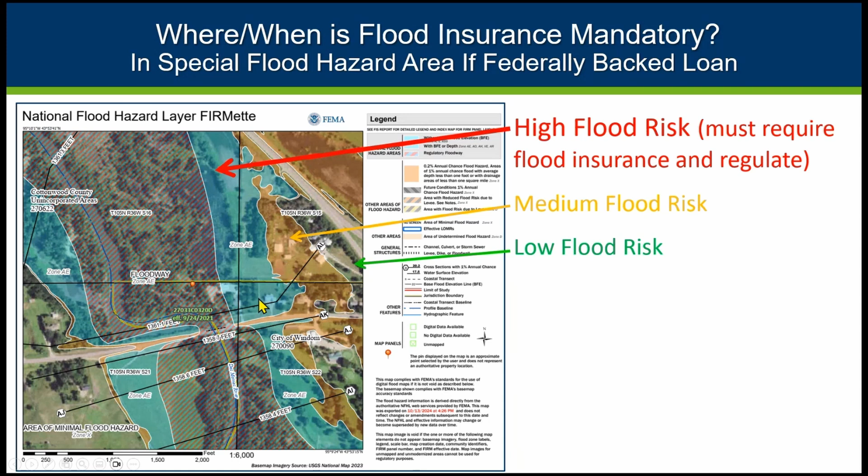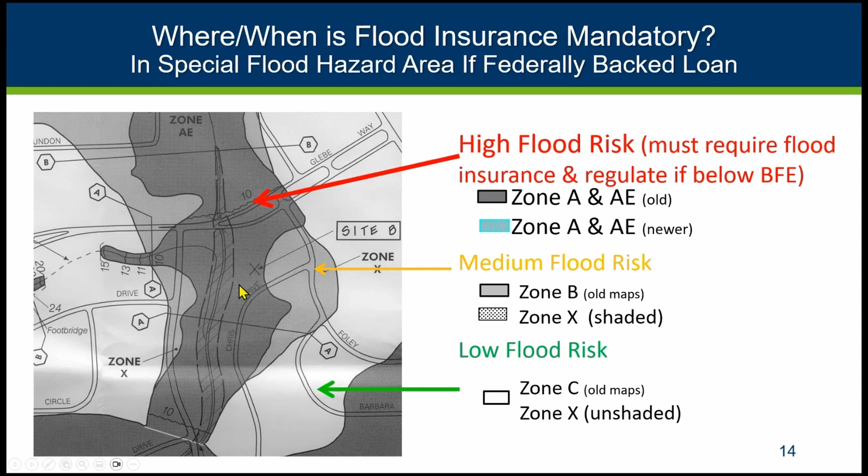On the older maps that unfortunately some of you still have, the high risk area, the special flood hazard area, is the dark shaded area, including the floodway if it shows a floodway. And again, you've got the medium risk area. It's good for planning purposes, helping reduce risk there, but that is not mandatory flood insurance there. We'll use similar terms here.

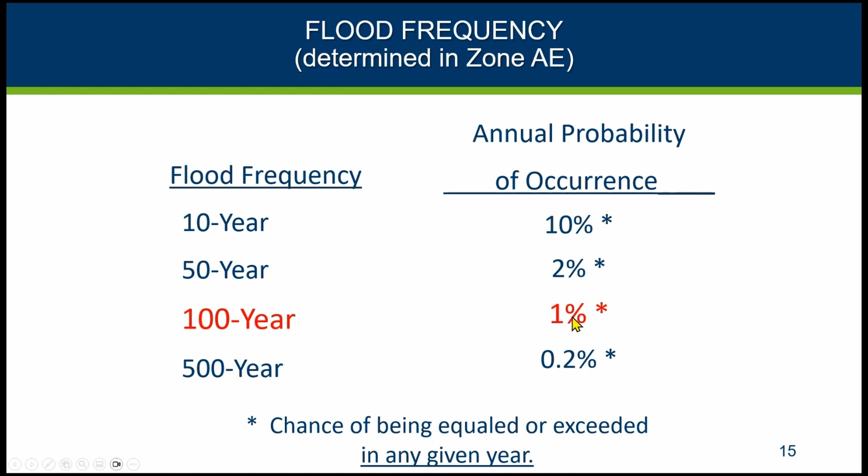We talk about the 100-year floodplain or the 1% annual chance floodplain. We try and not use the term 100-year all the time, but that's what people understand. But we try to not use it because we don't get floods once every 100 years. There are other frequencies available where we've got mapping and more data, but for the mandatory insurance requirement, we are using that 1% annual chance flood.

And here's some of the other terms I've already been using. FEMA will also call it the base flood elevation, or BFE. In Minnesota law, we'll call it the regional flood. But for insurance, we're going to be focused on the term special flood hazard area, or SFHA.

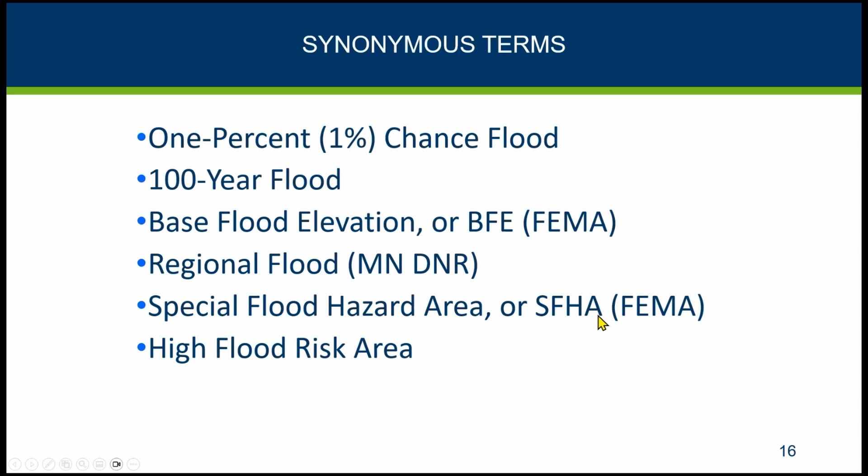So is it in a floodplain for zoning or for mandatory flood insurance? In this site, this is showing the FEMA mapped area, and this house, even though you can see it's really high, it is in the FEMA mapped area, and a lender must require them to get flood insurance if they've got a federally backed loan. Whereas this building over here, they're officially out of that area, at least on the current maps. In the future, when the maps are made more accurate using that elevation data, they'll be shown in the floodplain. But right now they're out, so they won't have mandatory flood insurance.

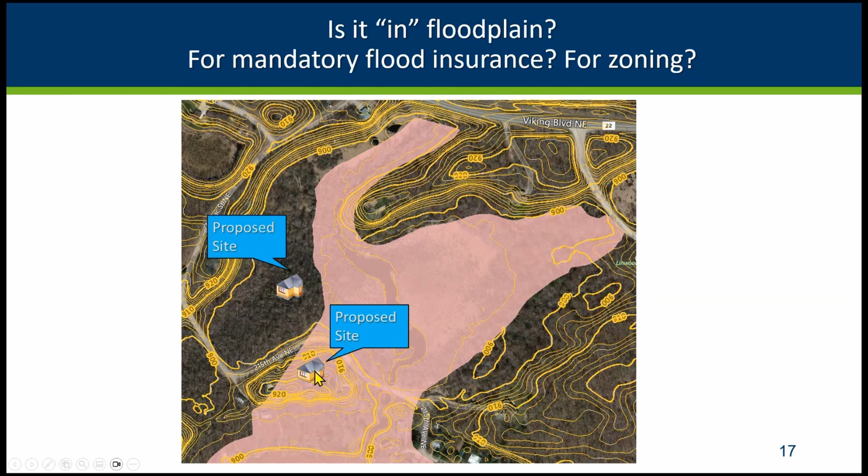But those of you who have seen our trainings on our regulations and have worked with the regulations in Minnesota know that we've got rules that say if it's adjoining a FEMA mapped area and the site is below the base flood elevation, your ordinance is regulating that building and making sure that they're building safely. But for folks like this that are on a high spot, they will be required to get flood insurance unless they get a FEMA exemption, basically a waiver.

And let's talk about that a little bit briefly here. So in this example here, you can see this building, this whole parcel is not touching the floodplain. Sometimes lenders will send out letters when there's new maps and say a place like this is required to get flood insurance because they're using some kind of a buffer. They're using computer overlays and looking at that. But this is an area that's clearly not mandatory flood insurance.

Here's an example of a building that if you look closely, you can see that there's space between the building and the mapped area, but there is mapped floodplain on that parcel. And that's a situation where the lender may say, hey, you have to get flood insurance. But if that person looks closely at the map, they're actually out and it's not actually mandatory flood insurance. But this one, it's just nicking the building. It's not hitting it a lot, but it is touching that building, and that lender must require flood insurance unless they've gotten that waiver there.

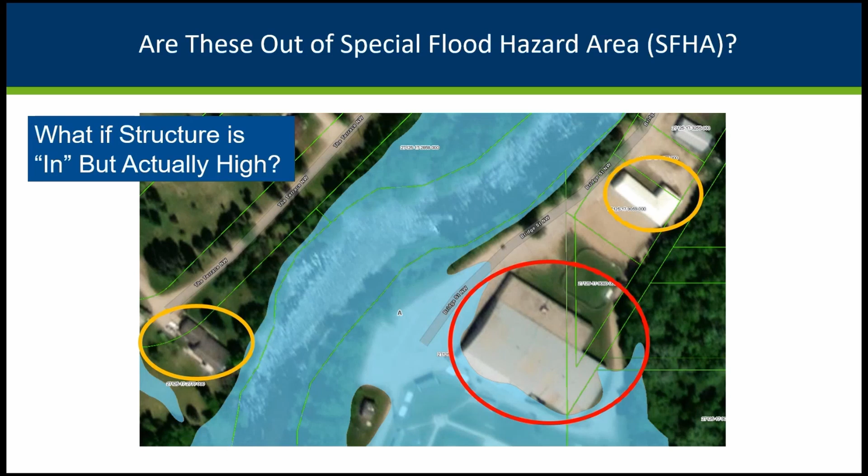So if the buildings are actually high, there is the option to get a letter of map change. And we've done separate trainings on this when we talk about FEMA map basics. We talk a little bit about letters of map change, and we've got an older one of our virtual trainings that goes into more detail about letters of map change in general. But a LOMA is when the natural ground is actually high and you submit that information to FEMA and they say, yep, we agree that's high, and you're officially not in the floodplain and you don't have the mandatory insurance requirement. An out-as-shown would be for that house that's close to the floodplain but not actually touching it. FEMA issues a determination agreeing that, yep, that building's not in there, it doesn't have the mandatory flood insurance.

Letter of determination review is an option, but it's not a great one because you have to pay and you don't end up with that actual waiver. It's more of a, does FEMA think the building's in the floodplain or not? Kind of a chance to argue with the determination the lender has made. But then a letter of map revision is similar to a LOMA if it's a letter of map revision based on fill. They've brought in fill and they've elevated, and FEMA will give the mandatory insurance waiver there because they've reduced their risk.

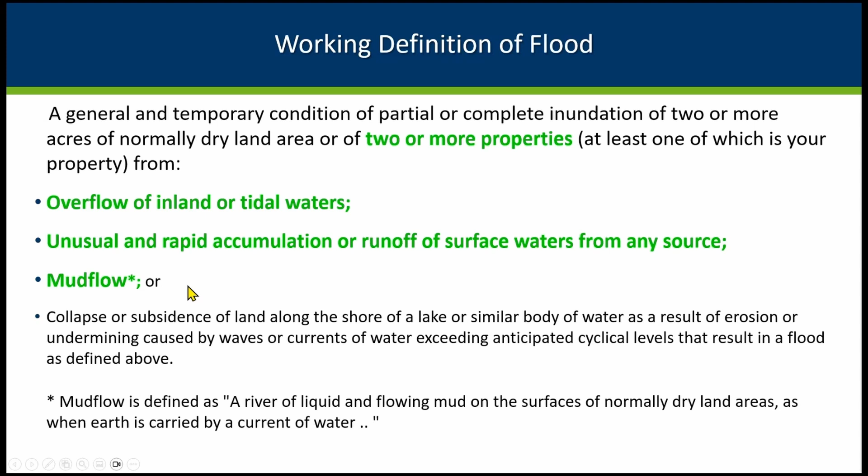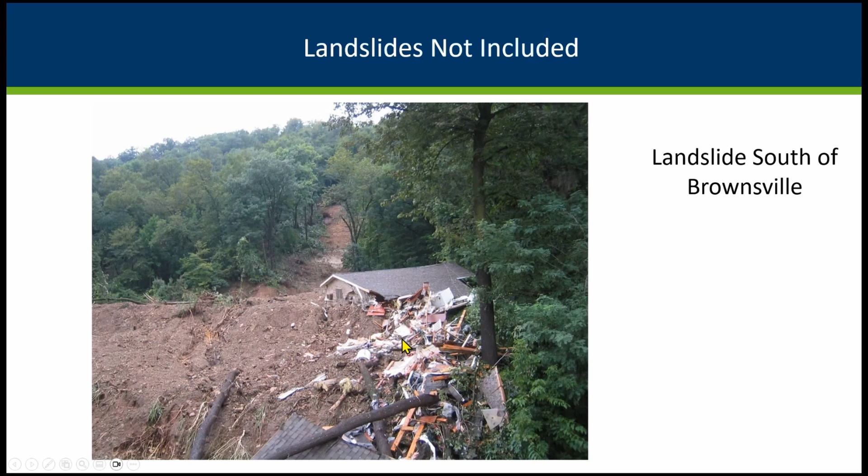There's also situations with mud flow, and if we get into that, we'll talk about it more with the community. That's a lot less common. And mud flow is different from a landslide. Landslides are not covered. So if you've got an unstable, steep area that gets oversaturated, boy, in 2014 we had a lot of these kinds of things, that comes down and landslides can be very devastating. This picture is a good example of how devastating they can be. And unfortunately, flood insurance doesn't cover that damage.

The contents coverage is all your stuff. And on the upper levels, it's pretty broad, the stuff that's covered. In areas that are below grade, in a basement, or if you're in a split level that's partly below grade, it's going to cover very limited stuff. It does cover your washer, dryer, freezer with food, and a few things like that, but it won't cover your stuff in the basement.

The other thing I want to point out is that it doesn't cover sewer backups or sump pump backups, and that is something you can get as a rider on your home hazard insurance. So another education point is making people aware that in many places that's going to be a really good idea, and it's not super expensive on your homeowner insurance.

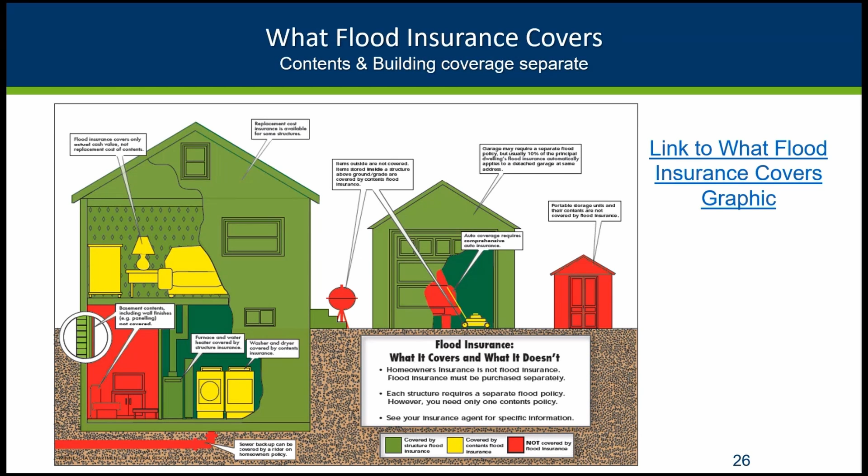But other things are not covered by the flood insurance. So if you leave that building wet and don't get in and clean stuff up, that mold and mildew is not covered. And some of these other things listed, things that are outside and separate, of course, don't get covered. The living expenses, if you need to move someplace else because your place is really damaged, the standard flood insurance does not cover that. I will mention that there are getting to be more private policies available. Some of them will have that coverage in there.

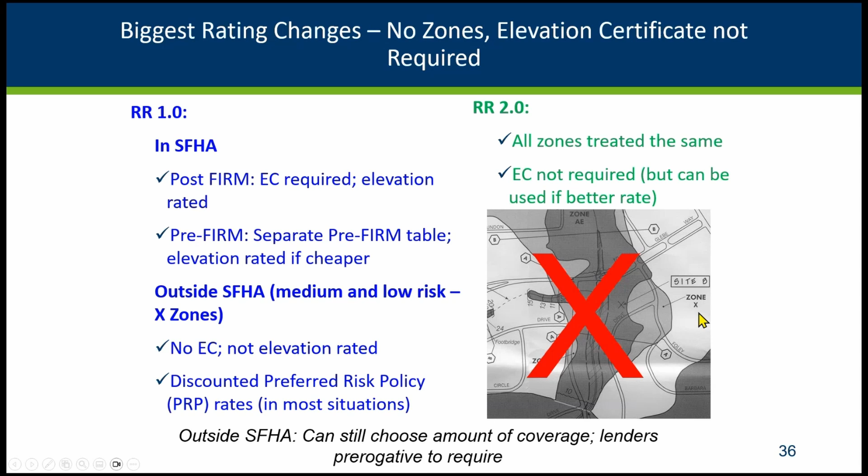Oh, and this is my reminder to mention that lenders, while there's a federal requirement to require flood insurance if you're in the high risk area, the lenders have the prerogative to require it. They're taking the risk giving that loan to that property. So some lenders might require flood insurance in the 500-year or other areas, but it's not a federal requirement.

And this was this preferred risk policy we used to talk about, and the premiums range from like 200 to 700 depending on how much coverage they got. Those have gone away as of a few years ago. So those are the ones that are going to take a while to get to full risk rates because they're taking 18% of this 200 to 700 a year, and 18% of that is not a ton. So some of them are probably on a 10-year or so glide path.

So what are they using now? Okay, in the past, those main things that I was talking about: what zone were they in? What's the flood elevation?

Also, they would look at, do you have a basement? How many floors do you have? That kind of stuff. And then they would require information on elevations if they were in the flood zone. Now we're looking at a whole bunch of different things. I'll get into a little bit more detail on some of these, but just be aware that they're looking at a lot more.

One of the biggies is the distance to the flooding source, and whether it's riverine or pluvial, that kind of urban flooding that you get from the big storms, or they now also look at distance from the Great Lakes. Certainly on the coast, whether the flooding source is coastal makes a big difference in the premiums.

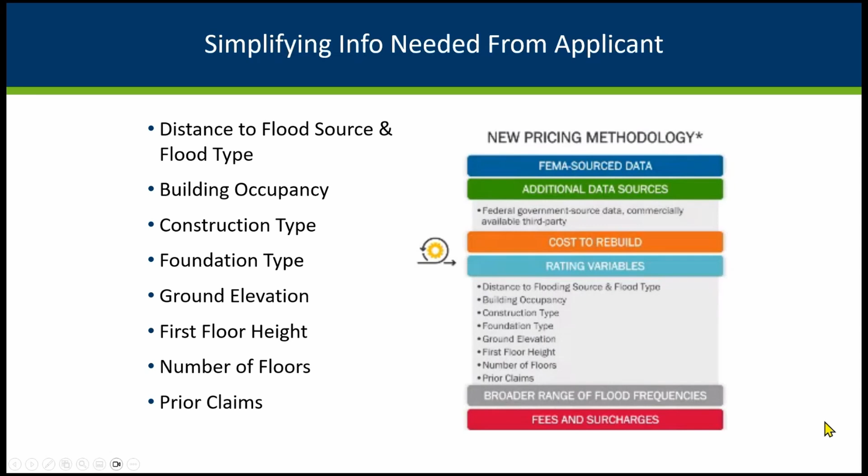But what they do is the agent will put basic information into the FEMA system. They've got this behind the scenes rating engine that takes a bunch of factors into consideration. You do look at the value of the building and the type of construction and a couple things that the agent can enter, but a lot of the factors and the rates are behind the scenes. So whereas in the past, I could look in a table and say, hey, if you're 2 feet higher, it's going to be this difference in your premium, we can't do that anymore. They use a lot of big data.

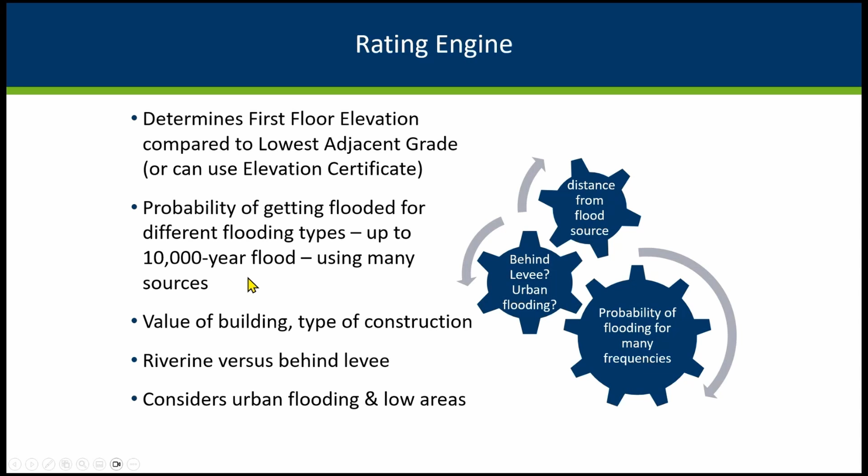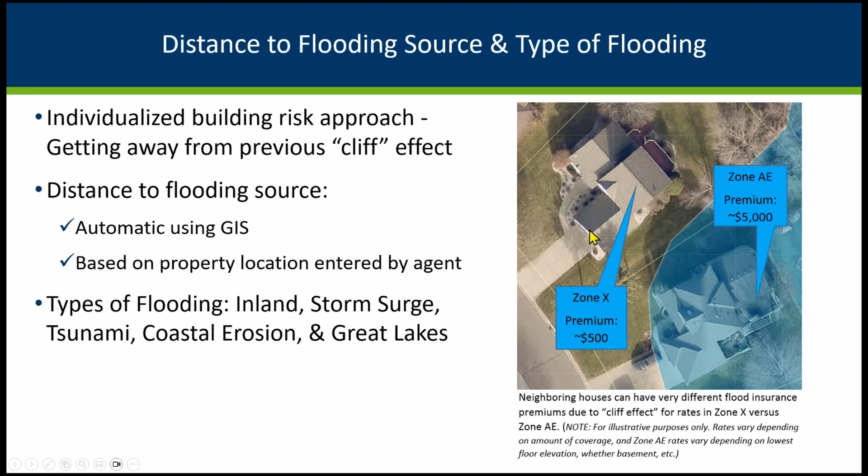But the good news is that we don't have the big cliffs. It used to be someone who's just inside the floodplain would have a big premium, and someone who's just outside could get the preferred risk policy, that cheaper discounted premium. And now these neighboring properties will be treated more similarly. So some of these folks had some nice decreases with the new system. It was fairer for them. But for many of our policies in the state, previously like 65, even 70% of our policies were those discounted policies in the past.

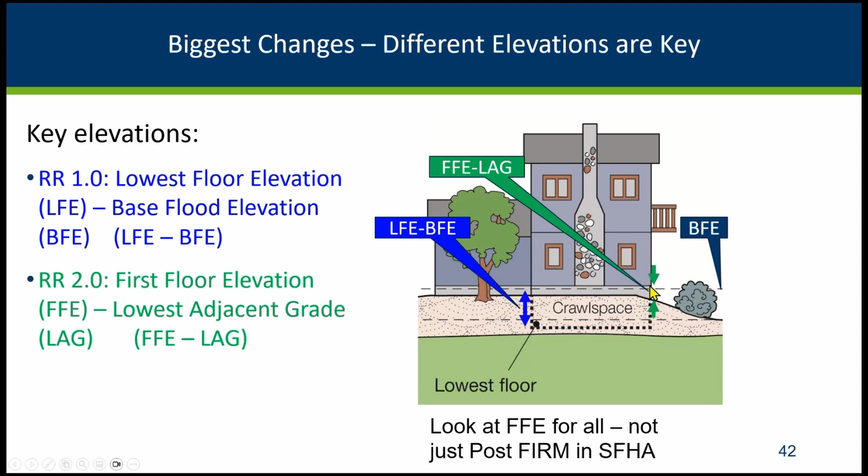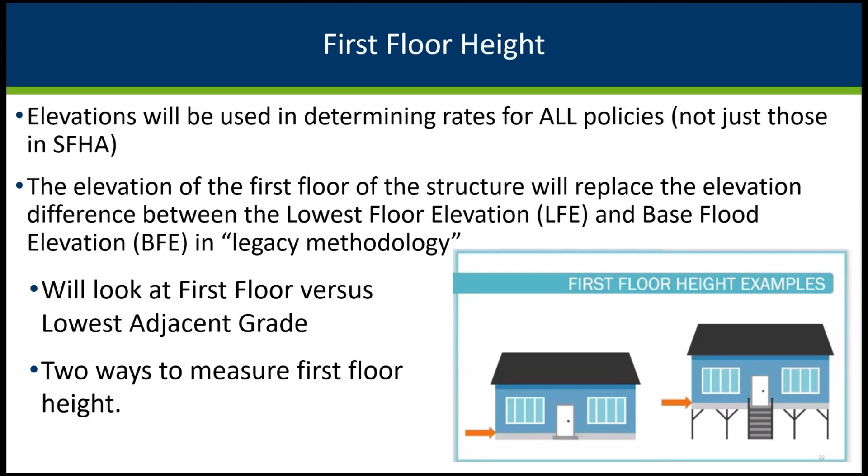So again, in the past, we looked at the comparison of the base flood elevation versus the lowest floor. Now they look at the lowest adjacent grade, the lowest ground touching the building, compared to the first above grade floor. They will look at the elevations and what's considered the first floor. Here's an example. If it's a slab on grade, it's pretty obvious where that first floor is. If it's up on pilings, it's obviously up here. But FEMA has different types of building options that the agents will use to rate the buildings.

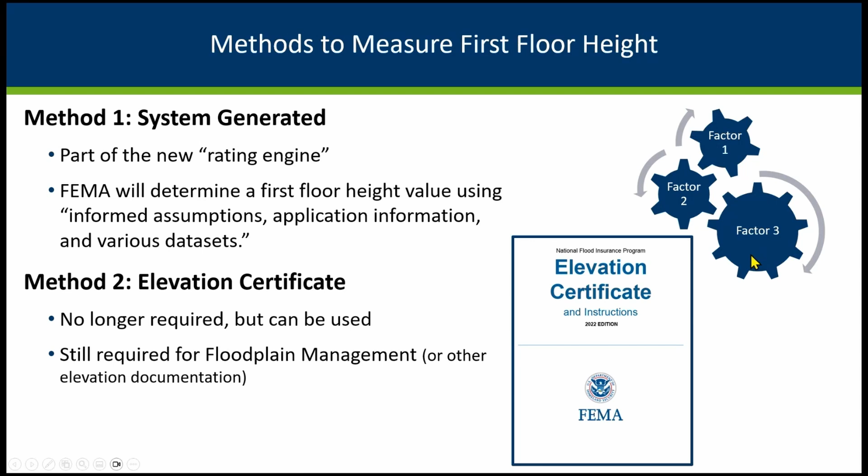But then you can include the elevation certificate. So you can have them use this behind the scenes, big data driven rating engine, or you can submit an elevation certificate and they will take whichever is better. If your elevation certificate gives you a better rate, they'll use that. If it doesn't, they'll go with the rating engine determination. So elevation certificates are still really helpful. They can even be used in the lower risk zones to help you maybe get a better rate. You still need surveys to get a letter of map amendment to get that waiver for the flood insurance.

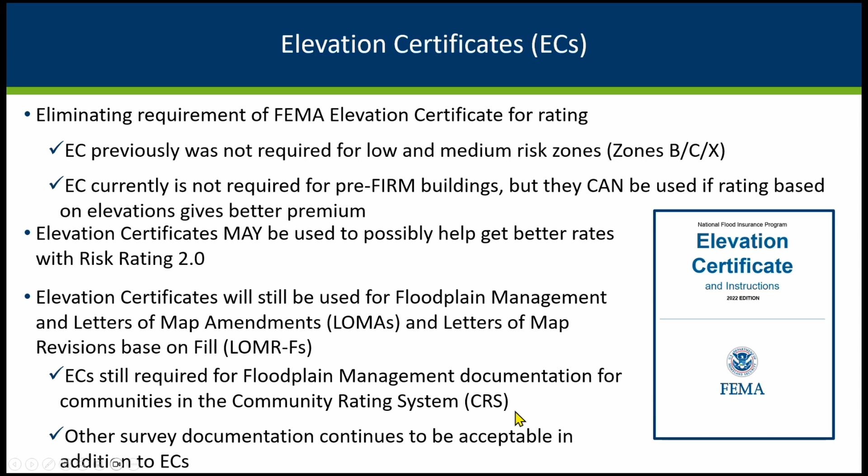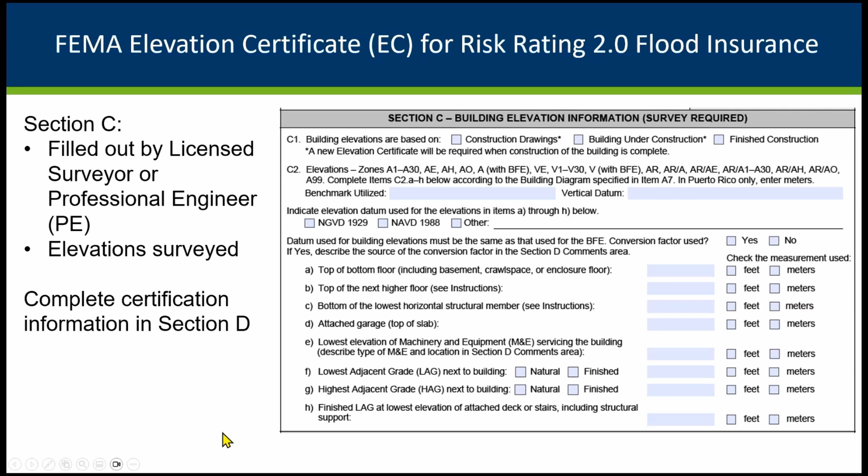And if you're a CRS community, you're required to have folks use the elevation certificate to document that they built correctly. So there's Section C of the elevation certificate that's used to show those key elevations, if it's filled out by a professional engineer or a licensed surveyor, and there is a new Section H where people can actually measure distances. The homeowner can do that, or anybody can. It doesn't have to be a licensed surveyor. I haven't seen any good data on how much of a difference that makes, but it is an option in the 2022 update of the elevation certificate.

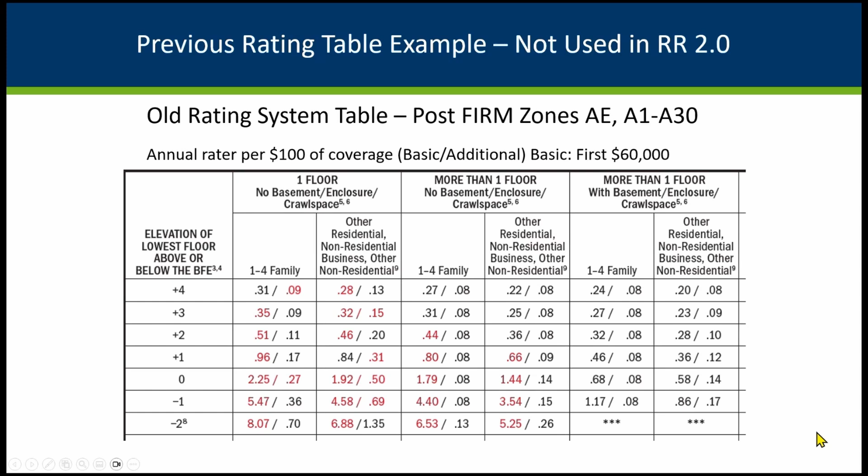So bottom line, the new policy ratings are more fair in terms of not having lower cost buildings paying a much higher percentage, basically. Prior claims are included now that hadn't been considered in the past, but it is a 10-year rolling window, and they don't include loss avoidance claims where they did something to prevent the flooding, or the increased cost of compliance claim payments, because those come out as a separate payment from their main claim when their flood happens. And if it was closed without a payment, there are some situations where someone makes a claim but they don't actually get a payment. I won't get into detail on this, but just be aware that they are starting to consider previous claims again in that 10-year rolling window, whereas in the past they didn't.

When they're doing the calculations, they're looking at a lot of different flood frequencies. So they're looking at, does it get impacted by a 10-year flood or a 25-year flood or a 500-year flood or a 1,000-year flood? So they are looking at more things.

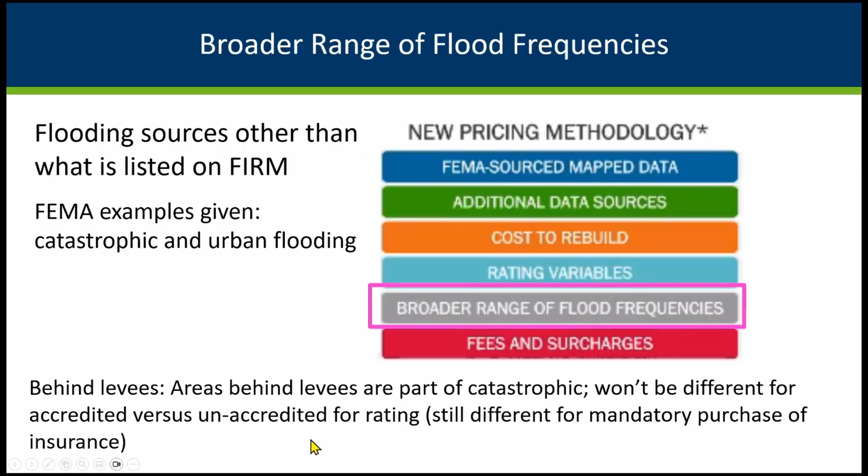One thing that is still not too fair right now is the way that areas behind levees are treated. And it doesn't make a difference if they've gotten a letter of map revision. That's something that we're discussing at the national level. For the mandatory purchase requirement, if they've done a letter of map revision, they're showing that area protected, so they won't be required to get a policy, but we want to encourage people to get those policies. And right now it's more expensive than people think it should be in those areas that have been protected by projects.

So a few things that you can do to reduce the risk are elevate your utilities, install openings, choose different deductibles, look at the amount of coverage that you think you would need for the kind of flooding you would expect in your situation, or provide an elevation certificate. And again, community rating system. If you've got a lot of policies in your community, it's a good thing to think about. Or even if you're doing a good job and want to show it, that's another reason people get in the community rating system.

Here's a little bit more about the community rating system. Again, all the policies now get the community rating system discount. Our highest rated communities, like Austin and Moorhead, I think, are up there. They get a 25% discount. Even just getting into the program at the lower level, you get a 5% discount.

A couple things that FEMA mentions that you can get discounts for is if you've elevated your machinery and equipment. It can't be in a basement; it's got to be up a level. The problem is that if you only have a one level building, you've basically got to put equipment in the attic, and that's not realistic. So that is something at the national level we've been discussing, that you should be able to get credit for doing partial elevation, not to the attic and things like that.

The other thing is that if you've got flood vents, you can get a discount. You don't get much of a discount unless it's like a full level tuck under garage type of wet floodproof design, but you do get a little bit of a discount for that.

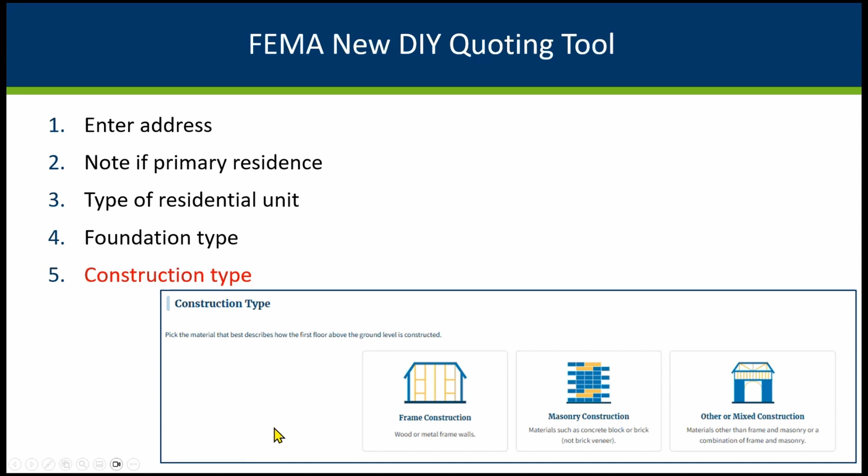And then it'll take you to what kind of foundation do you have? Is it slab on grade? Do you have a basement? Are you up on piers? And you click the one that's applicable for you. And then it'll ask what kind of construction do you have? Do you have wood or metal frame walls, which is probably most of the houses in Minnesota, or is it all masonry? Or is it some kind of mix?

And then it'll ask you, what's your square footage of the building? What was the date it was constructed? They make you put the month and day in there, which of course most of us don't know. So you probably have to make up a day. I know when I entered it, I just put June 30th because I didn't know. I know my house was built in 1976. I don't know what day.

Number of floors, not including the basement. And if it's slab on grade, they'll ask you another question about where your equipment is. Is it up in the attic or not? Or is it up a level? Then it asks you what kind of coverage, how much you want in coverage, and it'll ask you what deductible you want, and then you'll get a quote.

Folks at the Association of State Floodplain Managers have a group that's been reviewing and providing comments to FEMA on ways to improve this tool. I'm actually on that group, so if you have comments, let me know. I'll be sharing them with that group and with FEMA.

But one of the first things that we pointed out to FEMA is that we'd like to see a way to actually enter elevations, both to show information you might have in an elevation certificate, and because we want to be able to have people look at, gee, if I build it at this elevation, my premium is going to be this much. But if I elevate and I make it safer, not only will I be safer, but how much will I save in my premium on my flood insurance for a year or per month? So that's something that hopefully FEMA will get added in the not too distant future.